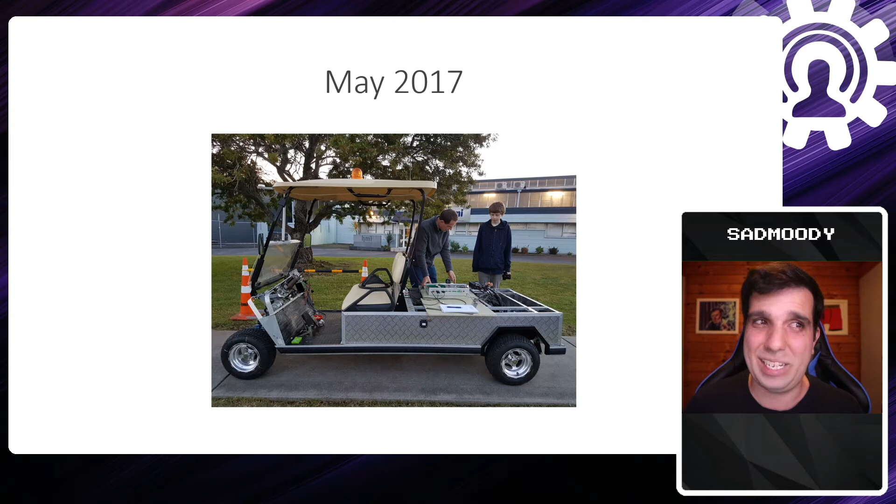And then by September of that year, we had the first autonomous vehicles running on New Zealand roads with these Ohmio Hops, these little 4-person vehicles, which was pretty cool. About a year and a half from getting to that stage, we actually delivered the first, I think, Southern Hemisphere produced commercial autonomous vehicle. It's a 20-seater, the Ohmio Lift. It's the first one made in New Zealand.

And it's also the world's largest 3D printed vehicle. So all the white parts that you see on it are just 3D printed. We had trouble finding a manufacturer that would build just a one-off. So we just 3D printed it in a 21 square meter 3D printer, assembled it in parts like a jigsaw, and we got it working.

And now that vehicle is working in Christchurch Airport, the same place we started our first trial. And we can get it to do things like stop and change its trajectory and that sort of stuff. So that's been a really cool ride, actually, pivoting from an electronic sign company to autonomous vehicles.

Now, entering into autonomous vehicles, we need to get some terminology out of the way. When people say autonomous vehicles, a lot of the time they mean different things. There's actually the SAE, the Society of Automotive Engineers standard, that's centered around what level of autonomy a vehicle is. It starts with level 0, which is not autonomous, which sounds funny. My '97 Toyota Corona is a level 0 autonomous vehicle. But that's a completely human-controlled vehicle.

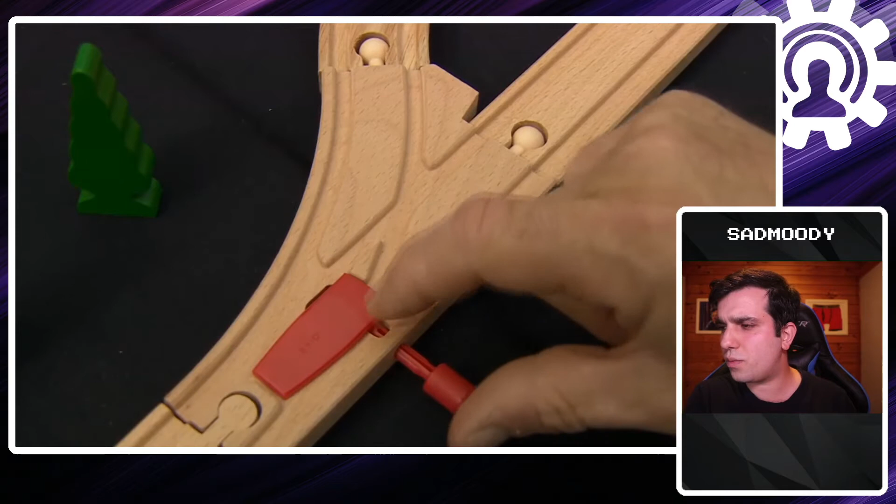It comes out of the field of ethics. Down this stretch of track, a runaway train is about to career. In its path are 5 unsuspecting people who will all die if the train hits them. But there's a switch. It will divert the train onto another track, saving the 5, but condemning one unsuspecting person to certain death. In essence, you have to decide, do you kill one person who's not in peril to save 5 who are? It's like an ethical dilemma.

There's no right or wrong answer. Do you intervene with a situation where more people would have been killed in order to directly kill one person who wasn't really involved in the situation? There's no right answer, and you can go on and on about it. Everyone has a different interpretation for it. My favorite one is this one.

Nicholas, this train is going to crash into these 5 people. Should we move the train to go this way, or should we let it go that way? Which way should the train go? This way. Uh-oh.

Look, it's open to interpretation. Everyone's got their own sense of morality, and we can discuss the trolley problem and what it means to each person. It's a totally valid problem. It's actually been talked about so much that it's also a meme. You would have seen these around, and I think we can officially call the meme dead. It's now used as slides at a conference. So this is my attempt to kill the meme.

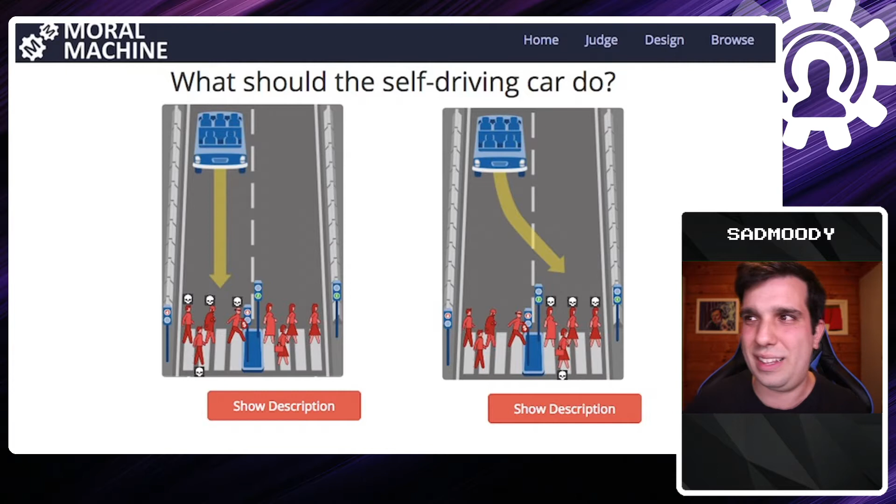Even MIT tried to crowdsource morality by creating this thing called the Moral Machine, where given a scenario and the vehicle decides who to kill, they get a gauge as to what society thinks is the right or less wrong thing to do in a situation like this. So in this one, it's a group of women, one is pregnant, they have the right to cross the road, and in this is a group of men, one's homeless, one's a burglar, and they're not allowed to cross the road. Which one do you do? There's all sorts of these. If you just search up MIT Moral Machine, you'll be able to participate in this.

But anyway, to understand why the trolley problem doesn't make sense, we first need to answer, how does an autonomous vehicle move? So let's take a couple steps back and think of things in really simple terms. When I was at school, I had these devices. They're called ladybugs in some places. In other places, I think they're called turtle bots. Basically, they're little programmable robots that children can tell, go forward 1 step, turn right 90 degrees, etc. And you can put a felt tip pen in this little hole, and it ends up drawing the picture that you programmed. This was one of my first interactions with programming, and I remember it really fondly.

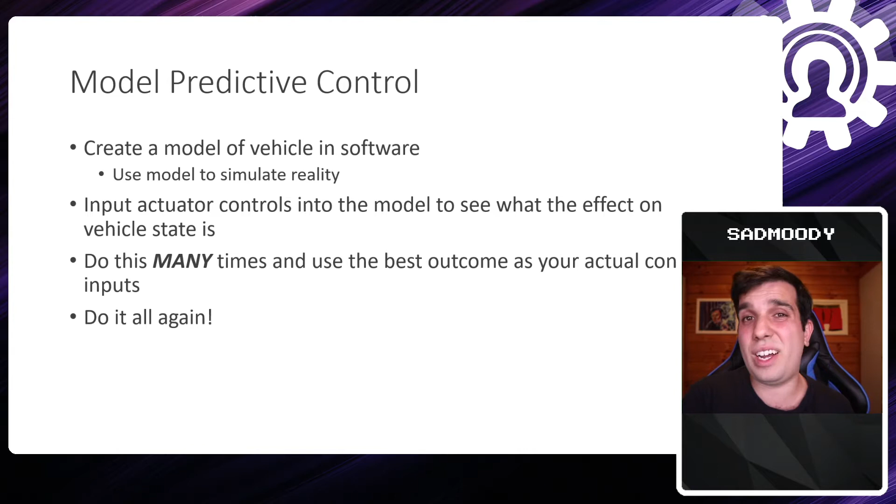But how do you find the best outcome becomes the next question. So how does an autonomous vehicle know the best outcome? Well, in terms of optimization, and this is an optimization problem, you don't necessarily go for the best outcome, but you go with the least worst. And that all makes sense as to why in this next slide.

The reason we call it the least worst is because we give something called cost to the model. So we have a cost function, and we tell it the things that we don't like, and we assign costs to those. So we say, if you hit something that costs a lot, you shouldn't stay still. If you stay still, that costs you. What unit does it cost? It's just a number. So you can think of them as like bad points, or money if you don't like spending money.

So you don't go faster than the speed limit. You up the cost the higher you are from the speed limit. Yeah, don't stray from the track. Don't turn at high speeds. So we can let the vehicle decide the least worst outcome based on the cost function that we give it.

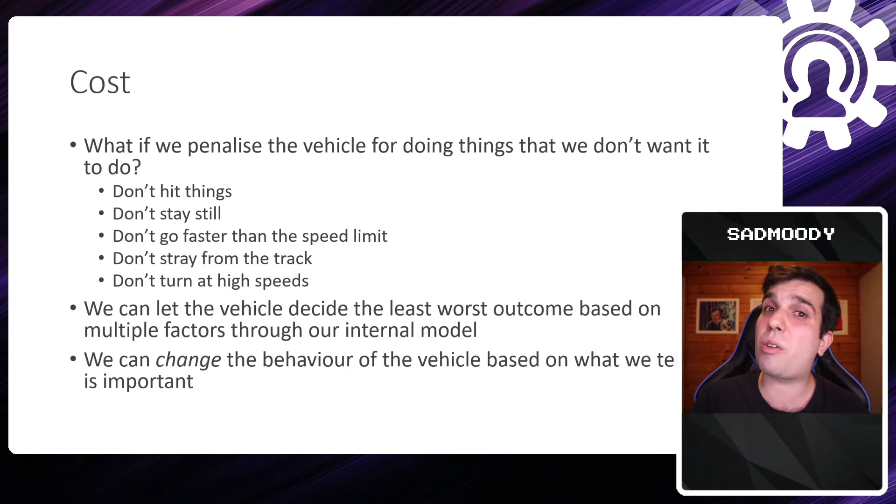If we find it doing something bad, we just introduce a new cost attribute, or we just append that cost function to have a cost associated with that bad action. And the emergent behavior should be that it doesn't do that thing anymore. So we can change the behavior of the vehicle based on what we tell it's important. So we're literally programming the values and how important certain things are to the vehicle against each other.

So what do we do inside our cost function? Well, we have different orders of magnitude. So the most important things cost the most, and the least important things cost the least. So the things that cost the most are obstacle avoidance. If you hit something, that is the worst possible failure for an autonomous vehicle manufacturer to go through. It should avoid obstacles at all costs.

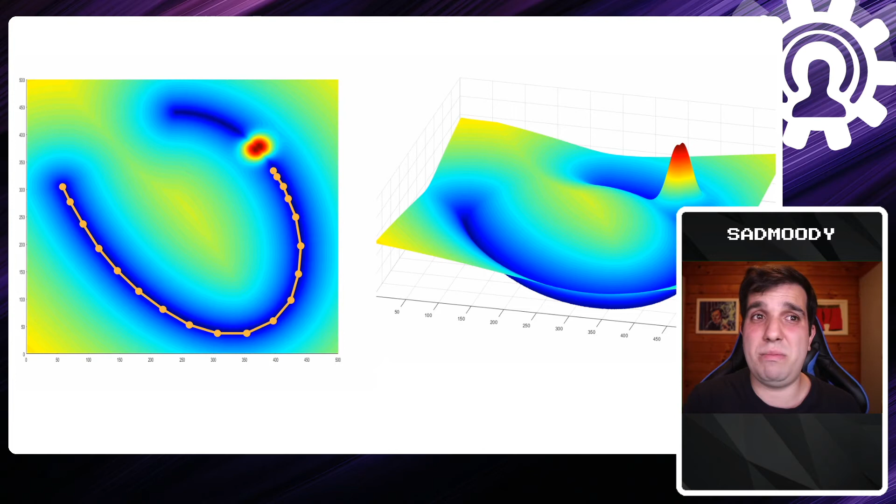And so you know that you just need to keep running along, and your path might end up looking something like that, because that's the path where everything is dark blue and it's okay. Now, if someone gets in the way, this is what the cost function looks like. So veering off the track is pretty bad, but hitting someone is way, way, way worse. And so your trajectory ends up looking like this, where the vehicle ends up stopping if something gets in the way, because if it goes around these, it would have veered off the track far too much for it to be okay. So the vehicle would just put on the brake.

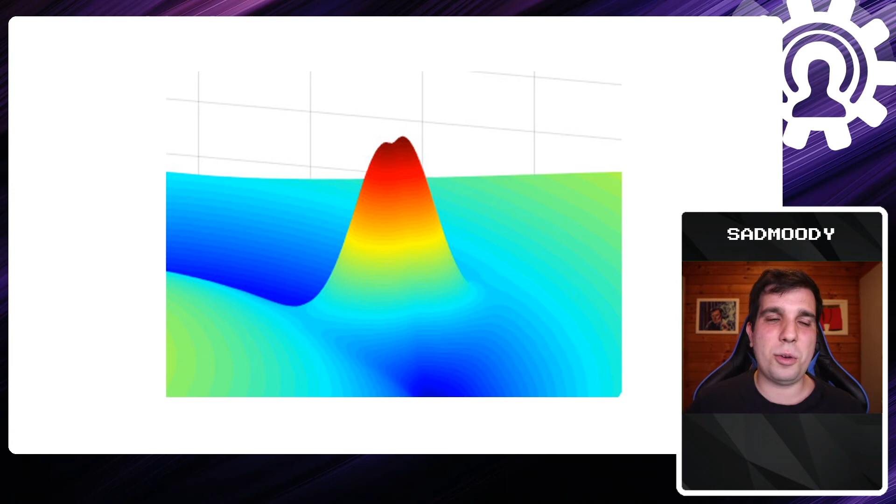So looking closely, this is two different people. One might be more important than the other. And on my streams, we joke about having one be a baby, one be a grandma. So regardless of which one is more important than the other, the order of magnitude of hitting something bad is so bad that it doesn't even compare to the rest of the track. And so you end up just braking. It just brakes. It's a really unattractive answer. It's a boring answer to what sounds like a very interesting problem.

And look, we even coded it. I coded this live on stream, and we had a vehicle that we built completely from scratch. And when going against a granny or a baby Yoda, it just sort of brakes, and that's all it does. We played around with it as well. We changed the costs to a negative number, so the vehicle started to go out of its way to run over baby Yodas and grandmas. So it became like a death machine, which was fun.

Not showing that clip here. Far too violent for this conference where we're supposed to be all good and PG. So someone's clipped that. I'm sure if you're wanting to look for it, you can find it.

So, how does an autonomous vehicle find itself in the trolley problem? What is the premise for it? Well, I've boiled the trolley problem down to this very basic statement: a self-driving vehicle is driving down a road when suddenly two people, a baby and a grandma, enter the path of the vehicle. The vehicle brakes do not work. If the vehicle continues, it will kill both of them. Should the vehicle swerve to hit the grandma or the baby? And that's just a very basic trolley problem. Let's investigate what is wrong with this, now that you know how things work.

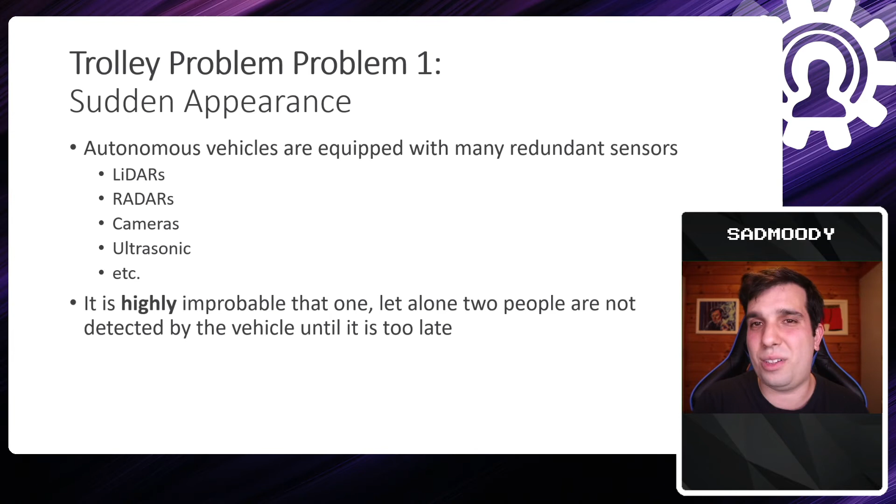So a self-driving vehicle is driving down a road when suddenly, so the first problem is the sudden appearance. How did people just arrive suddenly in front of the vehicle? A vehicle's equipped with all sorts of sensors: LiDARs, radars, cameras, ultrasonic. It's highly improbable that one or two people are not detected by the vehicle until too late. So it'll be driving slowly or not at all if it's unsure of its environment. And moving objects can be detected and their trajectories can be mapped. So you would need to react to the potential paths, not the actual path, of the obstacles around you, and that's what you avoid going into the future, and you react accordingly.

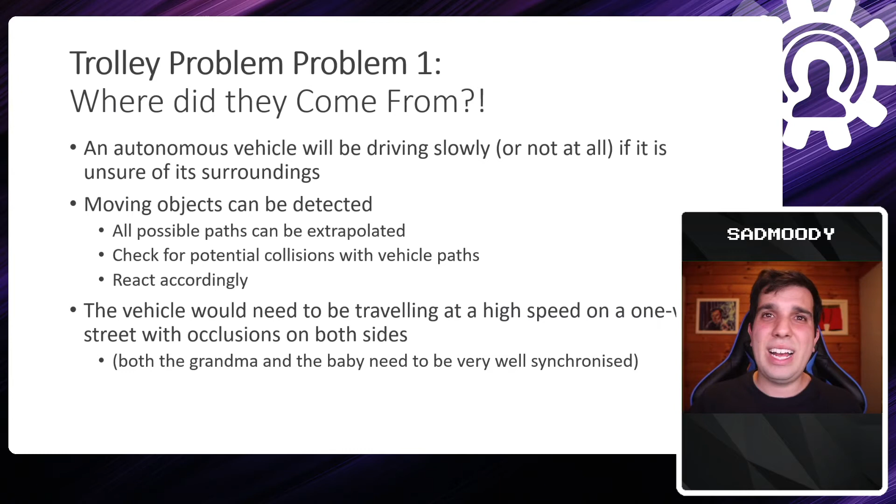So the vehicle would need to be traveling at a high speed on a one-way street with occlusions on both sides, with both the baby and the grandma being very well synchronized and jumping out from behind obstacles. But assuming that's happened, assuming we've got an in-sync baby grandma death team, let's keep going. It's suddenly two people, a baby and a grandma. Who's in the way? So a human would be able to say one's a baby, one's a grandma. But now there's two objects in front of the vehicle at the last possible second.

The vehicle needs to be capable of identifying the objects as people. Once identified as people, the vehicle needs to discern their age accurately. So it's not just about recognizing them as people, but figuring out what their ages are. So to do that, you'd need to build some computer vision algorithm that can see what is the age of the people in front of me. And you're penalizing age, not bad skin or posture. And you need to be sure that that baby on the road is a baby, not a doll.

There's a lot of problems around this. And it's not about just getting the latest computer vision algorithm or something like that and just letting that run, because you need things to run at a safety critical level. And a safety critical level is a much higher barrier that you need to pass. These need to run reliably.

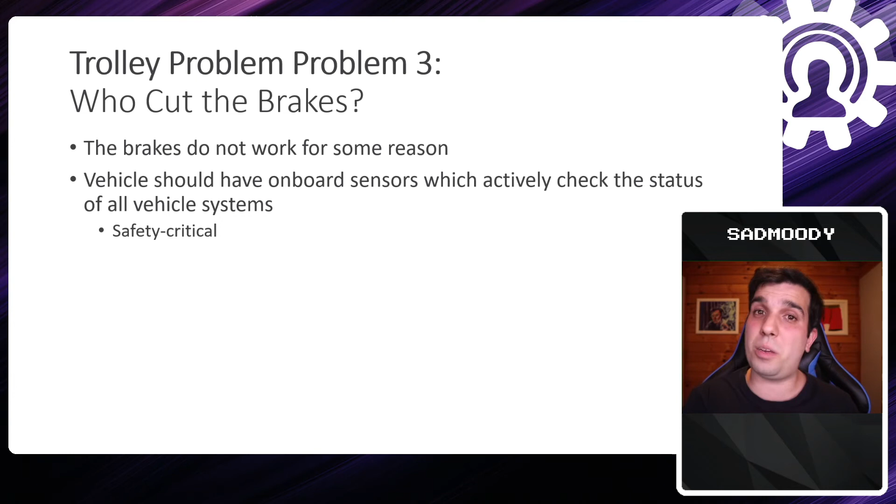Let's carry on. So the baby and a grandma enter the path of the vehicle. The vehicle brakes don't work. Why don't the brakes work? It's always given as a thing that's just happened. A vehicle has onboard sensors which actively check on the status of all the vehicle systems. So if the brakes don't work, the vehicle shouldn't start. It'll be much better with autonomous vehicles than it is for the vehicles today. But okay, let's keep going.

If the vehicle continues, it'll kill both of them. Should the vehicle swerve to hit the baby or the grandma? Swerving, that's a huge problem. So an autonomous vehicle shouldn't be engaging in a Hail Mary maneuver, you should be minimizing the harm. However, swerving is a chaotic behavior that's incredibly hard to model.

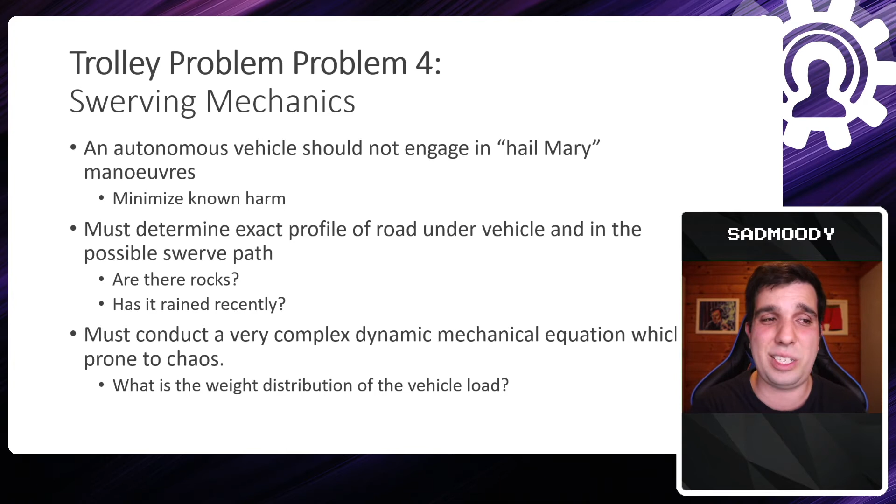You need to know if there are rocks in the way. You need to know if it's rained recently, if there's paint on the road, what's the coefficient of friction in front of you, what are the treads like on the tires. It's a really complex dynamic mechanical equation, which is prone to chaos. So what's the weight distribution? All of that changes what happens in that situation. But all right, you can assume that that's done.

But I mean, there's so many problems. Here there's 4 extremely hypothetical hypotheticals. If they suddenly appear, if you can detect both of them, if the brakes aren't working, if you can work out how to swerve. It's so many ifs, hypotheticals on hypotheticals, when it just brakes. That's all that happens. The vehicle just brakes. But, okay.

So, we know that the trolley problem isn't something that makes sense. But why is it so popular? I need to understand where it's coming from, because I need to be able to answer these people that constantly ask these. And these people are regulators. There's some technical people. There's also some not so technical people. And they vary. But I need to understand what their motivations are for asking a question.

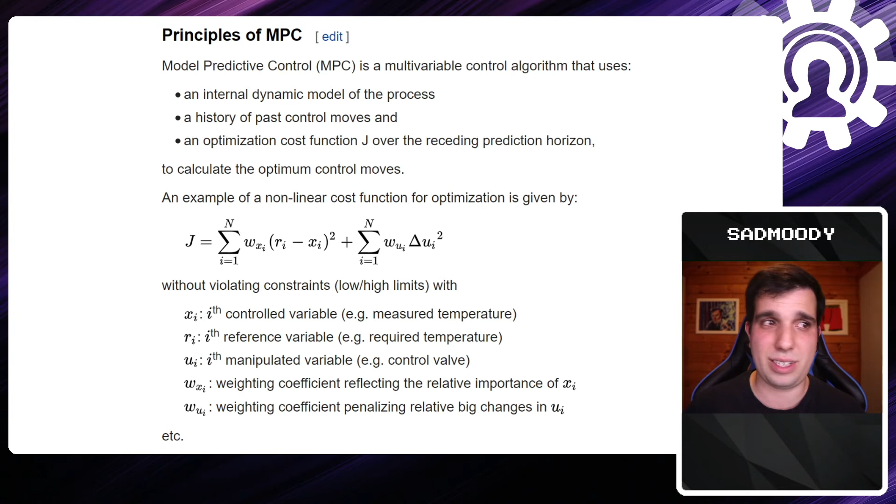Weird flex, but okay, I've got a PhD and I have trouble understanding some of this stuff sometimes. So if I have trouble with that, what's someone who has no scientific background like? So what it comes down to, in my opinion, is science communication or miscommunication. We're not talking about technology in a way that makes sense to non-technical people. The way we communicate technology is not accessible to most people. And this gives you a couple of problems.

Either you overpromise or oversimplify something, where you say, trust in this technology, it'll solve everything. Or you make it seem so complicated that the person can't even understand it. Each of these leads to different outcomes. One is inevitable disappointment with the technology and a lack of trust in what you can do in the future. If you say, we can solve all our problems using blockchain, for example, and someone implements that and it doesn't work, they're not going to trust you anymore going forward. Their likelihood to adopt new technology is compromised.

And if someone doesn't understand something, or you make it overcomplicated, it might make them scared, or it might make them so bored that they won't care about what it is you're talking about. So there's far too much time and effort, especially in the field of autonomous vehicles, being spent answering or mitigating the wrong problems because they're seen as critical or important.

And the big thing around this is that decisions about technology will still be made even if the decision makers don't understand the technology. Like if you have a minister for transport that doesn't come from a technical background and they don't understand what you're working on, they're still going to make legislation or regulation that outline what you can and can't do. And look, no decision's also a decision.

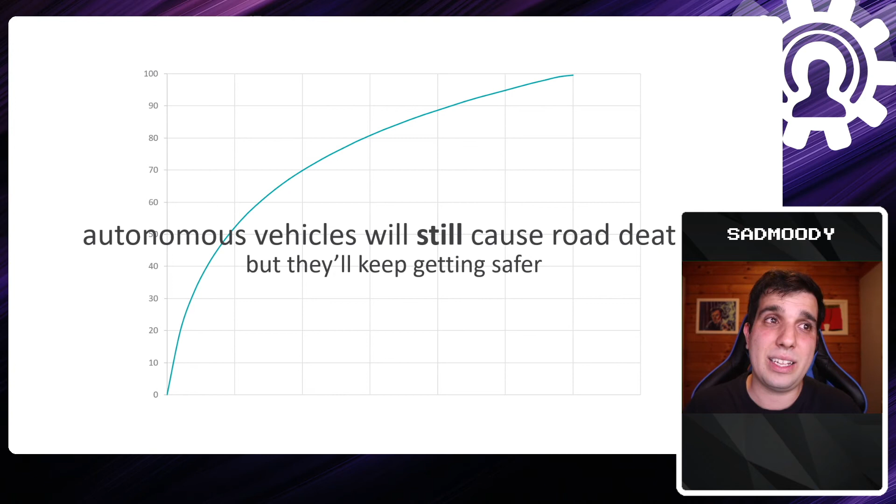So autonomous vehicles will still cause road deaths. No one is saying that they're going to stop every death that happens on the road, but they'll keep getting safer. It's the law of incremental, sort of diminishing returns. Every year you get incrementally less and less better, approaching 100% safety, but never quite getting there. They're going to keep getting safer. The more you wait, the safer they'll get.

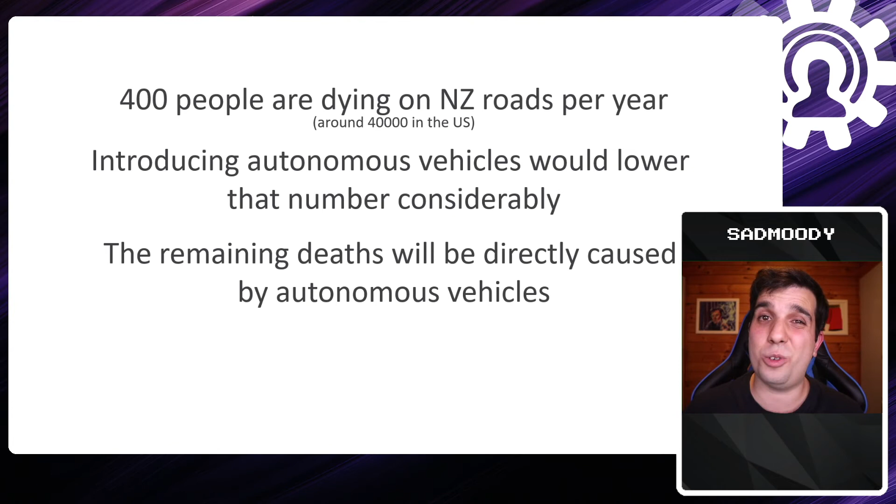So you're a regulator. There's 400 people dying on New Zealand roads per year. In the US, it's 40,000. So one person a day dies in New Zealand, 100 people a day die in the US. Introducing autonomous vehicles would lower that number considerably. However, the remaining deaths will be directly caused by autonomous vehicles that you introduced as a regulator. Would you pull that lever? That, to me, is a trolley problem. Thank you.

Cheers. Do we have any questions? That was my talk. Welcome. Thank you for coming to my TED Talk, guys. Sadmoody, how do you really feel about the trolley problem? Trezzy.

Look, the actual trolley problem is fine. It's something that we can discuss, and it goes into the purpose of the actual trolley problem as the philosophical ethics problem. That's a great thing and a fantastic exercise to go through. But then when you try to fit it around the autonomous vehicle deciding who to kill in a last minute scenario, that makes people discuss far too much about things that don't even really impact autonomous vehicles.

So I can tell you that because people think that the trolley problem, as I presented it before, is real for autonomous vehicles, that's holding back the rollout of vehicles, which could lead to lower road toll. And by road toll, I mean deaths on the road. So, it's dangerous to have these sorts of ideas and these discussions that hold back technology.